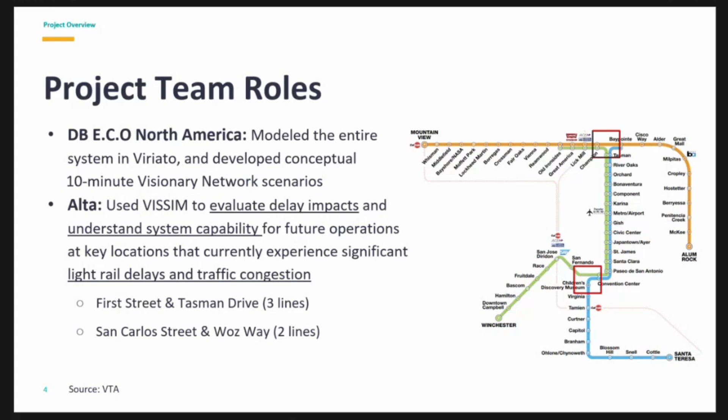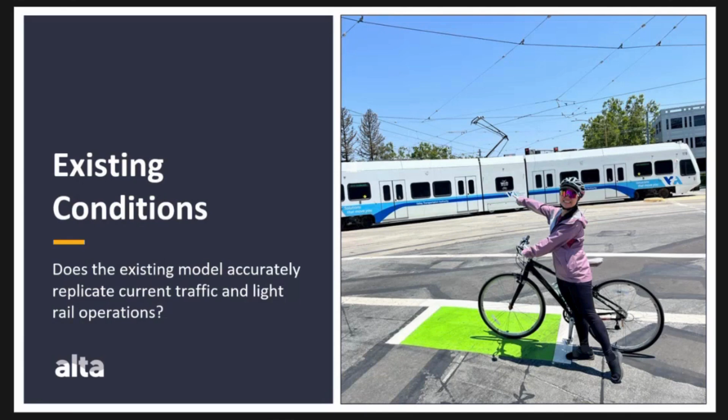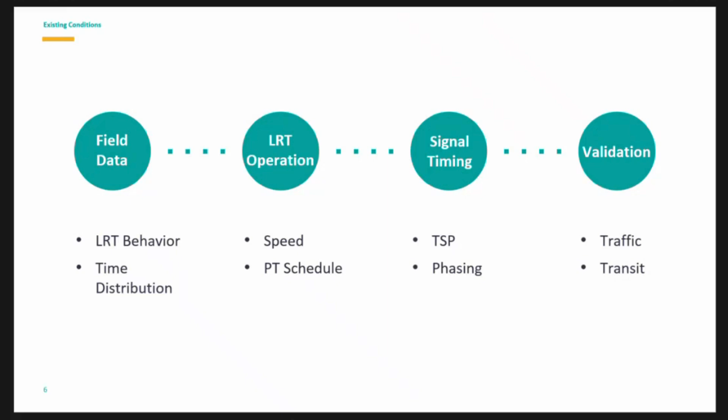Yeah, I'll spend more time talking about the existing conditions because it's not that easy to accurately replicate the current light rail and traffic operations at those intersections. There are a few things I need to tackle. We did the field observation through videos. When we collect turning movement counts, we have at least two angles at each intersection to record all the light rail movements and vehicle queues. And we also have the light rail operation data from DB and from the video observation. And the most difficult part is, of course, the signal timing. And we'll do validation later after we have the existing model.

Yeah, so we saw some very interesting light rail behavior at both locations. There are some additional stoppings at the station or before the intersection. One is, if they arrive ahead of schedule and this is a timed station, they'll need to wait at this location more than the standard dwell time of 20 seconds. And we also saw some lower priority trains yield to other routes at mid-block before they even approach the intersection, as well as some trains waiting at the switch, similar to the Muni project, just waiting at the switch before approaching.

And for time distribution, because we don't really have 100% on-time performance for those light rail lines, I apply those deviations between the schedule and the actual arrival time into the PT lines, like here, this customized time distribution. We have the mean deviation of 40 seconds and standard deviation around 20.

We got the speed profile for the light rail trains from DB, and at some locations it's very complicated because there are different kinds of curves and also sections where trains run beneath a freeway where we have a slower speed. So I coded all those speed locations in VISSIM according to this diagram.

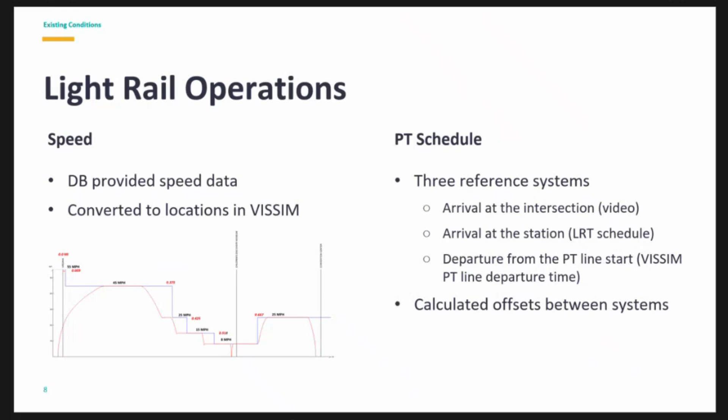So this is how typically VTA TSP works. After the upstream intersection, we have this advanced detector, and this whole distance is the travel time between this one and the next one, the check-in zone. And after the downstream intersection, we have this checkout zone.

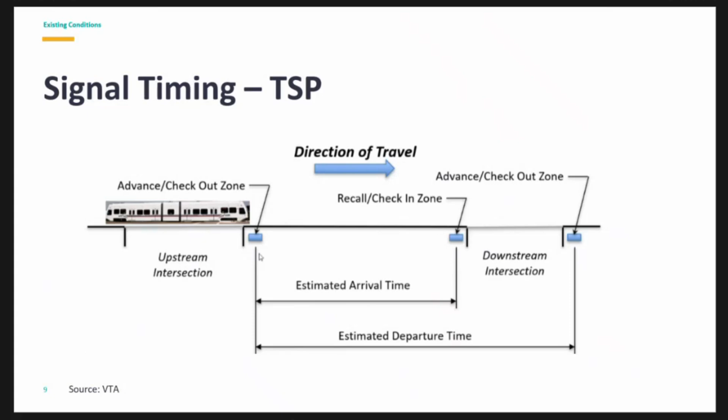However, for our locations, this is not always the case. So this is part of the timing card I got. As you can see, we have 6 different movements, and each one with its own TSP.

So for the eastbound orange line, T3, we don't have an advanced detector. And for this Tasman station approach, 5 and 2, the advanced detection is at the station itself because it's too close to the intersection. And for the other direction, it's also at the station, but it's a little bit farther away from the intersection, like 800 feet.

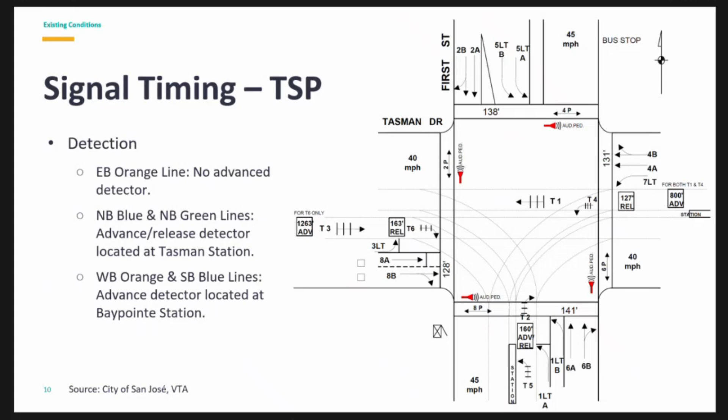So next slide, I'm going to show how I coded TSP. By the way, this is also the free operation, and we have 2 dummy phases for light rail. 4 of them are using those 2 dummy phases.

And another complication is the LPI. So basically, I did some online search and didn't find a very easy way to code LPI. Instead, there's a workaround to code this as an overlap signal group with delayed green.

So those are the parent signal groups, 12, 14, 16, 18. It's the same here. But for the real vehicle phase, I have 4 seconds of delayed green for them to account for LPI. And those are the TSP coding for all 6 movements. We do have priority for some of the movements over the other ones.

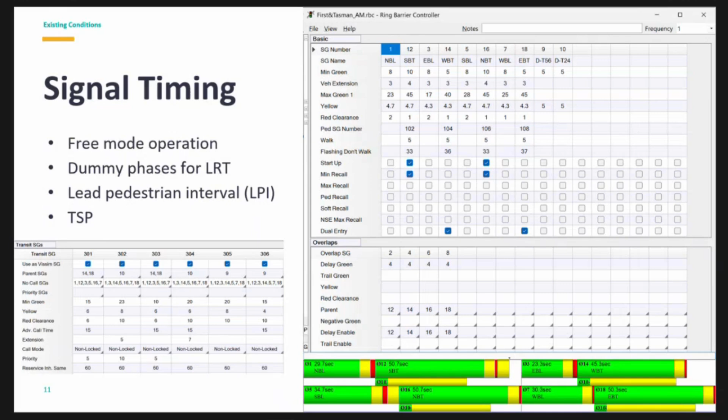So after figuring all those out, I thought I had already overcome the biggest challenge for this project. However, then I hit this. When I tried to finally run the simulation, I got a warning saying we cannot run this ring barrier controller in this version of VISSIM.

So I built this model in VISSIM 22. However, it has 2 different RBC, the old one and the new one. The old one supports TSP, but the new one doesn't. You can only see that base timing and detectors under the new one. And that's why VISSIM 2022 cannot run the RBC and gave me that warning.

And I also tried to use the 2021 version. However, it just cannot read the newer version. So I was kind of in this loop and out of options. By the way, at that time, I didn't have many friends using VISSIM, but I do after this conference.

So finally, I found a solution in the 'What's New in PTV VISSIM 22' document. They acknowledge not all the features are supported, like preemption as well as TSP, but you can manually copy a file from the 21 installation folder to the 22 folder. So I was able to get this beautiful model running for the existing conditions.

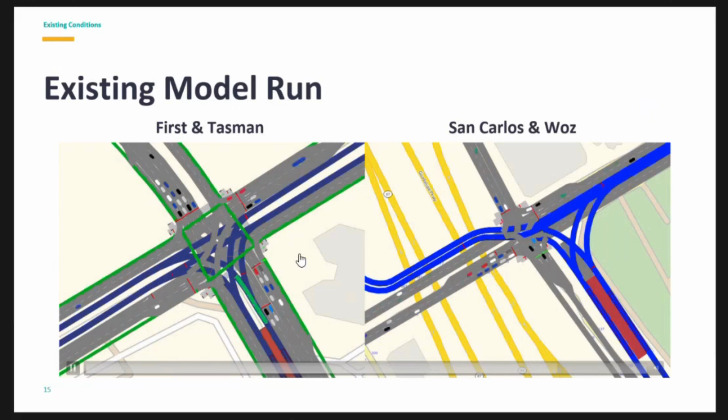See, we have one train stopping at the Tasman station and approaching to the intersection. And finally it got a green.

So for traffic condition validation, we have some previous studies using Synchro that gave us the intersection delay. We compare that with the VISSIM delay. Although it's not apples to apples, we get fairly close results for the PM peak.

And we also looked into the volume change between the 2023 study and this study. For AM peak, we have an increase of 8%, and we also see an increase in intersection delay.

Unfortunately, we don't have the same level of information for the other location, San Carlos and Woz. However, we did some visual inspection of the queue lengths between the video observation and VISSIM results. They're also within the same range.

And for transit, we're talking about how can we measure transit delay at intersections. So we came up with two parameters. One is the chance of stopping. When we say stopping, it has nothing to do with the station. It's all about the intersection and signal.

And the other one is for those trains that stop at the intersection, what's the median stop delay for them? So those are the results for both locations.

As you can see, in general, our result is better than the video observation, but that's primarily because of the additional stopping behavior we mentioned earlier, like stopping at mid-block for higher priority trains, or stopping to wait for the switch to happen, or if ahead of schedule waiting at the station, or between the station and the intersection, something like that.

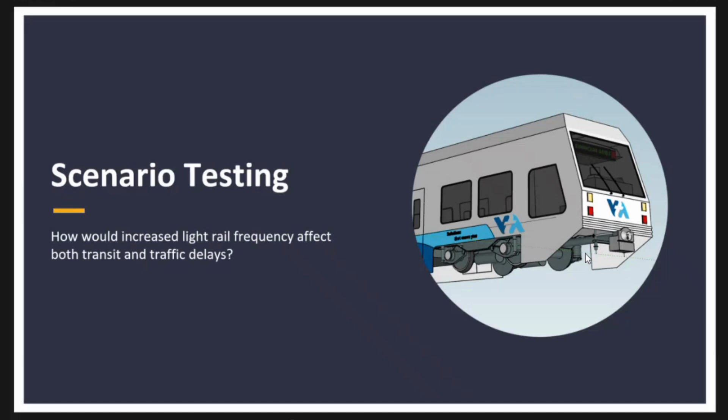Moving to the future scenario testing, how would increased light rail frequency affect both transit and traffic delays? This is pretty straightforward. We tested 4 different scenarios. Right now we're running 15-minute headway, and in the future we may have 10-minute headway for all lines, or we cut the green line so it only runs through this location with 2 lines, keeping the same number of trains per hour. Another scenario is pretty aggressive, making headway for blue line only 5 minutes with 36 trains total, or something in between at 30 trains per hour.

This scenario maintains the same number of trains but with only 2 lines, which reduces the chance of stopping by about 8%, and median stop delay by 2 to 8 seconds. This varies for different lines, so we have a range. And for traffic delays, it's even better.

For scenario 3, for example, we did see some occasional bunching in this direction, and both stop delay and vehicle traffic delay increased by about 15 seconds.

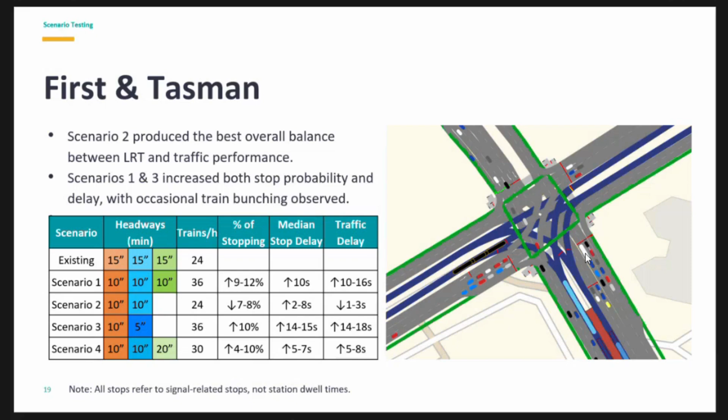I'm going to run the animation, this one.

By the way, we created this light rail model in SketchUp. It's very similar to the real world light rail over VTA, and we imported it into VISSIM.

Another interesting fact is VISSIM, at least the 22 version, only supports SketchUp models below the 2019 version, so I had to ask a friend to help me do that conversion.

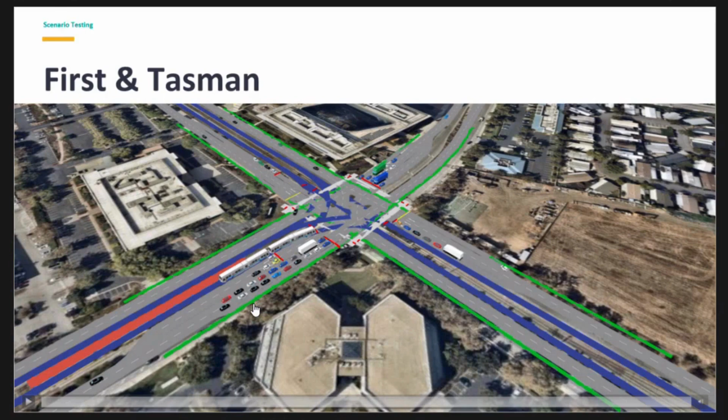We did some additional testing to see what else we can do to improve light rail service. One was to add the missing advanced detector for the eastbound orange line. That alone can reduce stopping chance by up to 30% and cut stop delay by about 4 seconds for those stopping at the intersection.

VTA is pretty bold about how they can improve service. One test we did is to eliminate all the vehicle left turns at this location. This graphic shows what happens if we have only through movements and right turns at this location. Surprisingly, it's very good for traffic operations - we can improve level of service from E to C. However, for light rail, it's not that significant, only up to 7 seconds, and that's primarily due to the reduced cycle length.

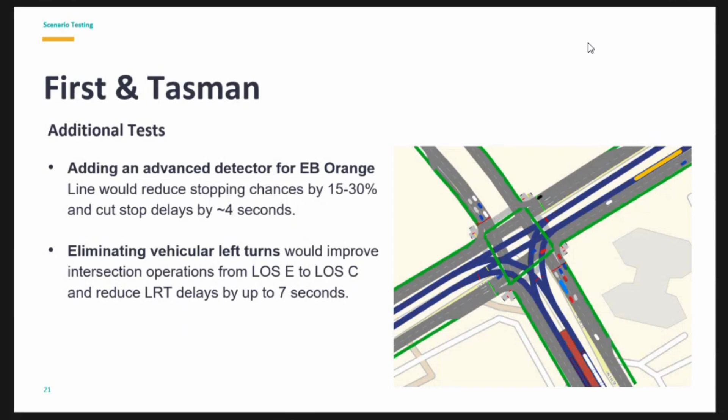For the San Carlos and Woz intersection, we tested 3 scenarios. Similarly, we can reduce from 15 to 10 minutes for both lines, or 10 for one line and 20 for the other, keeping almost the same number of trains per hour. Or we reduce headway for the blue line to 5 minutes, matching the other location, and keep 15 minutes for the green line at this location.

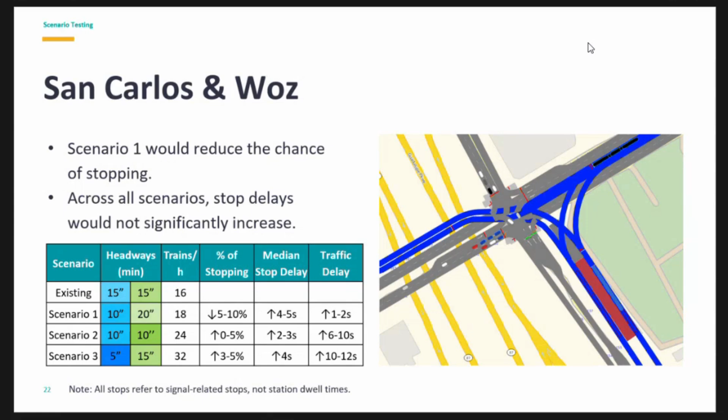Overall, scenario one is the best, and we can reduce chance of stopping by up to 10%. For vehicular traffic, it's not that much. The role of this study is to inform VTA on which scenario to move forward with for their service planning, so traffic delay here is only a reference - we did not really focus on traffic compared to light rail.

Another simulation for San Carlos and Woz Way. It may look like 3 directions, but this one is only the service track, like this turn here. So we only have light rail running through here, and this one.

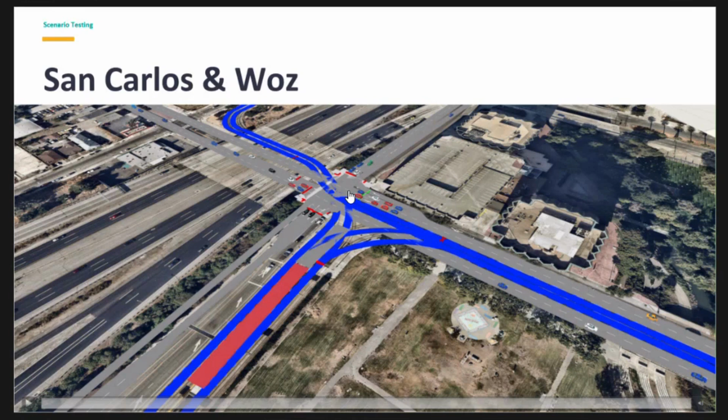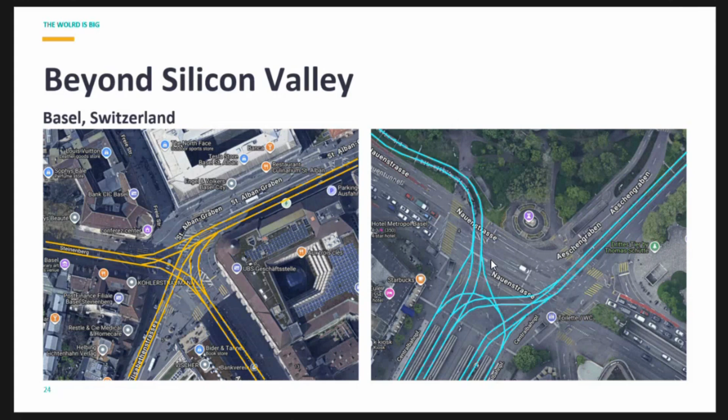This concludes my introduction for Silicon Valley. I thought this was the most challenging intersection in the world regarding light rail operation, until I traveled to Europe and saw some other bizarre intersections in Switzerland. Like this one, with 4 directions and more than 6 lines. At another location, there are actually 2 intersections very close to each other in front of a train station, and all those lines fit into the light rail station in front of the train. So there's a way to go.

Thank you, everyone. Any questions?